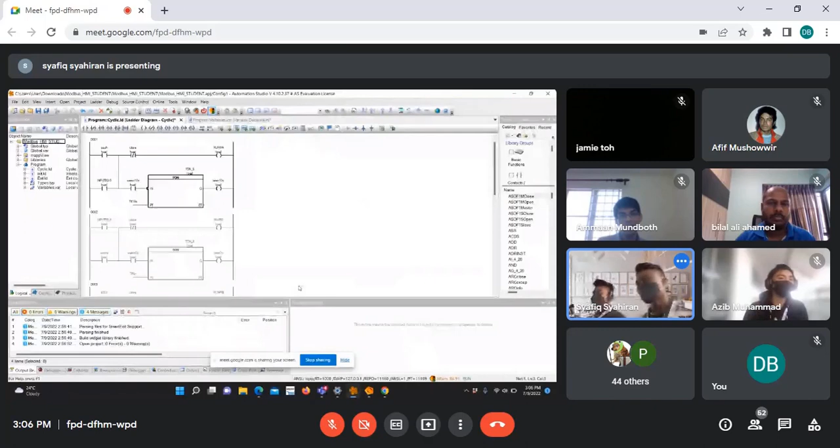Okay. Can you hear us? Can you hear us? Yes, loud and clear.

Good afternoon, first of all. So we are from Polytechnic Brunei.

So this is our PLC design. We are representative, one of the team representatives from Brunei. So this is our project, PLC project.

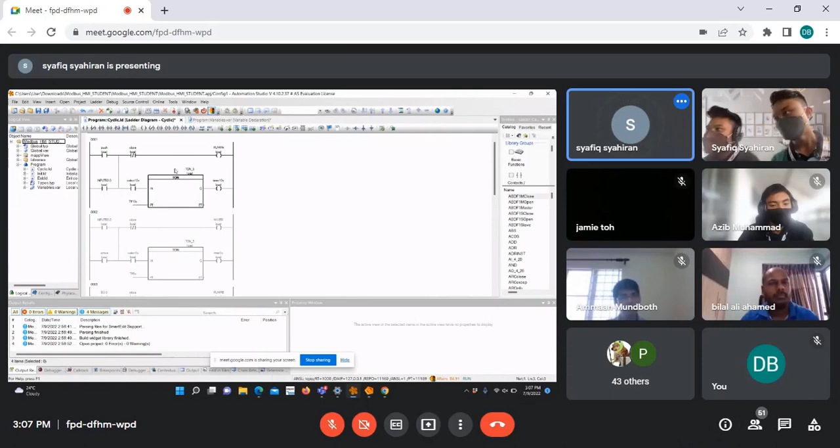To be honest, it's nothing much here, because this is our first time doing this kind of project, the programming project.

So here's the push button, PB. So it's connected to the close.

And because it connects to the 3.0 input, after 8 seconds the mixer will automatically open for 5 seconds, and the process will repeat until it reaches the limit sensor.

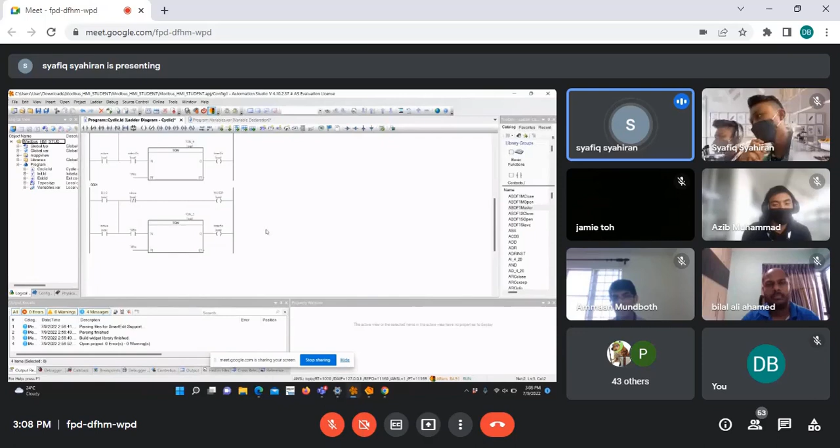So maybe that is what we could do because we haven't had enough time. As you know, this is our first time doing this, so it is very hard for us to deliver what we were taught to do.

Do you have anything more to add? That's all from us.

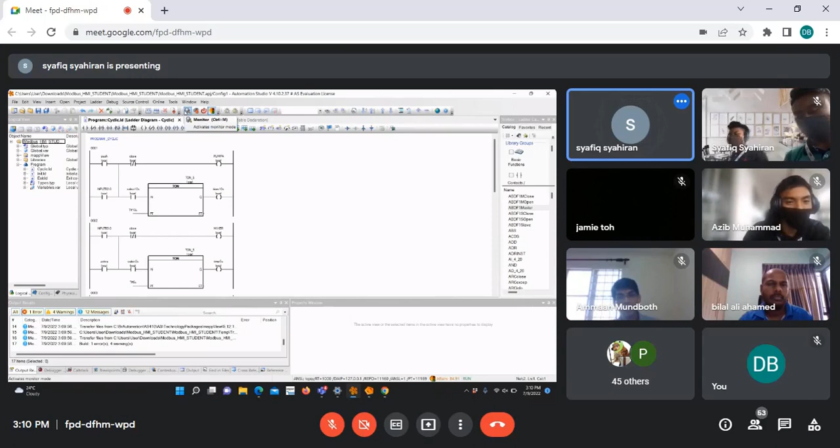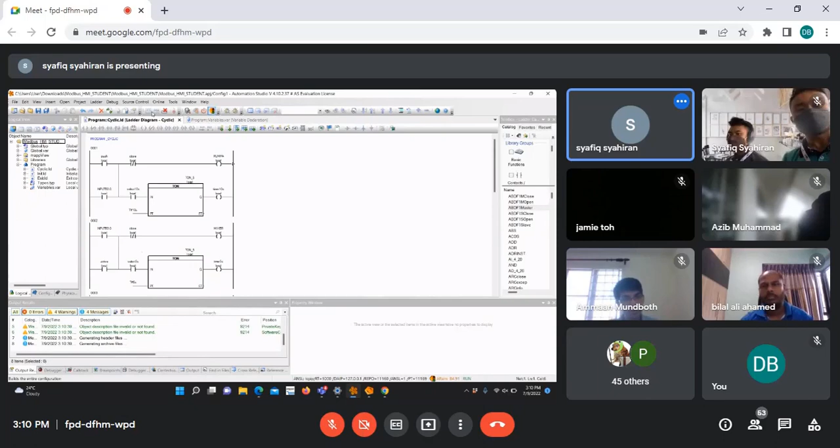How come it's an error? Monitoring. Oh, there's a problem.

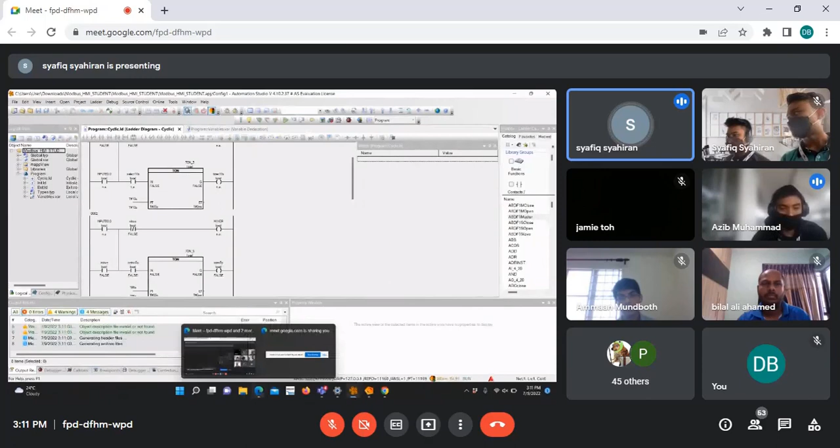There seems to be an error. Mr. Steven, there seems to be an error on the simulation. So maybe you can continue on with the next question. Yeah, sure, I think they can continue. No problem.

Is there any question from other judges for this team? Okay, if not, thank you Group Without A Name for that presentation.

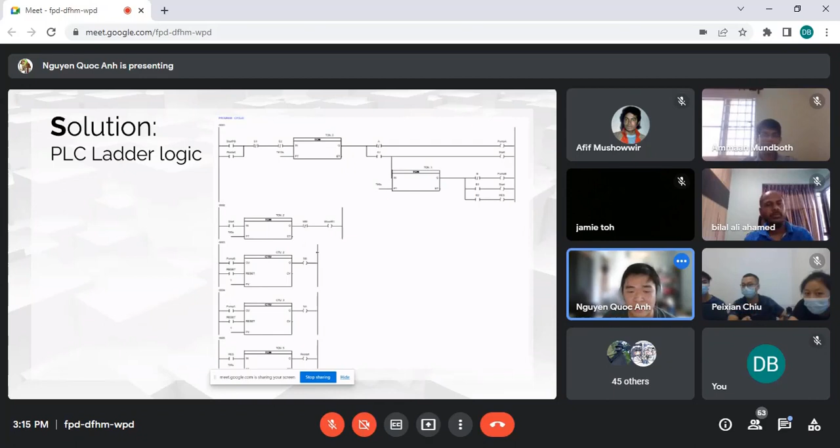For the video, because we are having some technical issues, we cannot do the recording in time. So sorry about that. Okay, so now this is our Q&A.

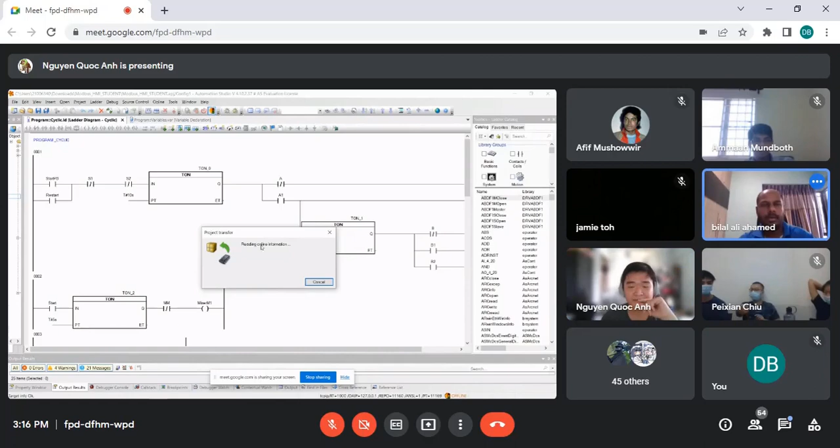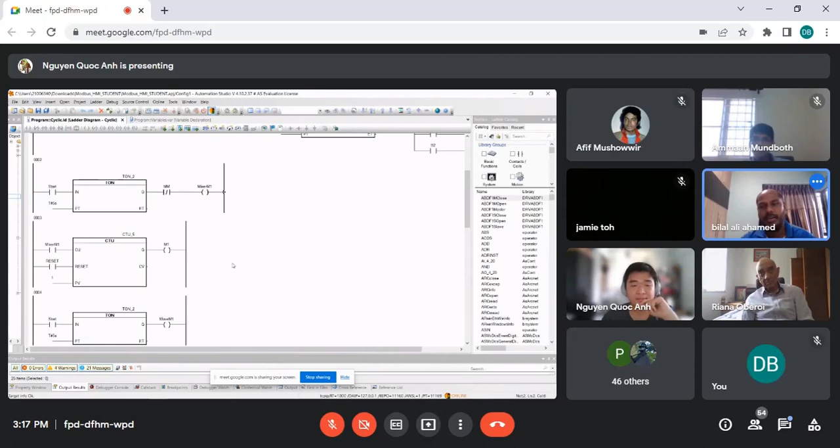Okay sure. Since you guys are studying, I can recommend something here: you can add a comment line for each of the ladder rungs so people can read the logic behind it. For example, start, stop, this is okay, but what logic does each ladder perform? If you make a comment on top, that's how it's normally done. This is just a few lines of program, but if you have a few hundred ladder logics, it's very difficult to read through and understand the logic. So it's always good to have a comment on top of each ladder. Keep it up, good.

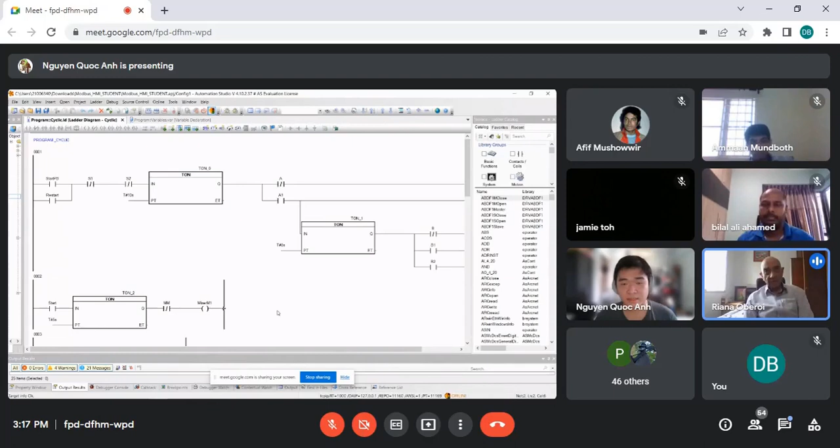In the trials, the sequence of activation is the way that we wanted, but so far we're still having the problem with restarting the pump to get it to an off position so that we can start the loop over again. The problem we have is actually the signal here. We cannot get it to reset from the start, so the TON here cannot restart itself, and that's the only problem we're having until now.

What is the total time of the whole one cycle? I think everything together, I would say about 23 to 25 seconds.

And you said you had a problem with starting the mixer. The mixer, so far we can get it to operation. So far, the CTU here, which you want to use to reset it, hasn't been tested because of the problem I mentioned earlier about connecting online with the software.

How much more time would you need to fix it, do you think? I'm not sure, but if possible, maybe about 2 hours, so that we can go through everything once more and make sure it's working properly.

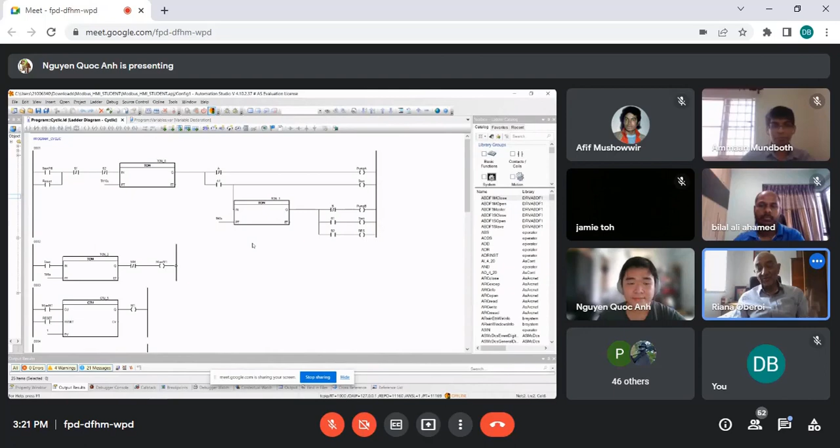From your problem statement, I got a glimpse of what you're trying to do, so I was able to comment. Thank you very much for that.

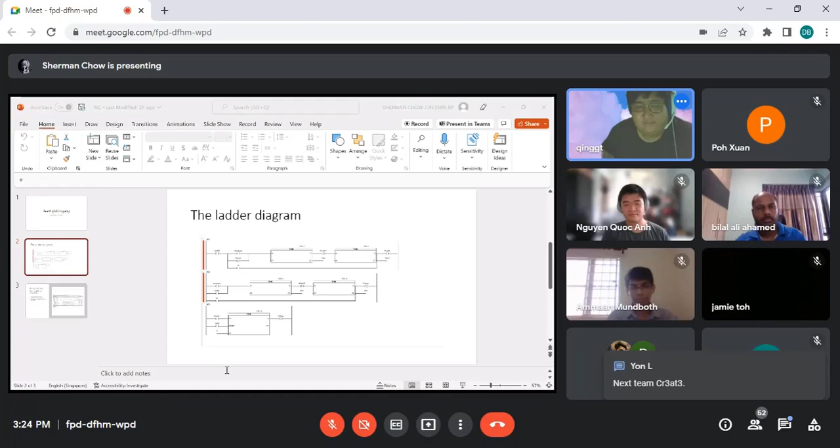So this is our ladder diagram for our circuit. Can you make it bigger? Sorry, I'll zoom in a bit. First we have the start push button, and then a timer for each of it, because the requirement is to have certain timing after it closed. So we put the timer beside the button as required. After that we use S2, which is like a break - so let's say it reaches a certain limit, it will let it flush through.

For the counter used for the third circuit, we need to connect the first counter, which is at the second circuit. After that we put a reset below the counter. After that the Q will be connected to the full tank - it can help us count how many times the start button has been pressed.

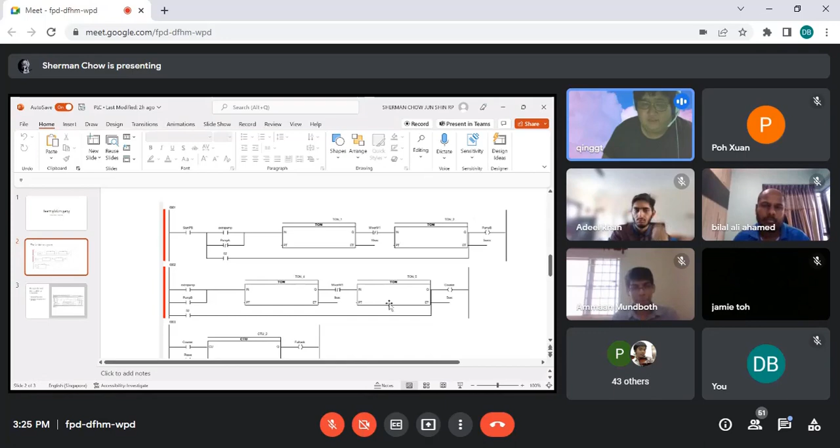I think Sean will present how the parallel backup pump works for it. For the parallel path for the backup, we just add another initial pump, so when the first signal comes in, it just goes through.

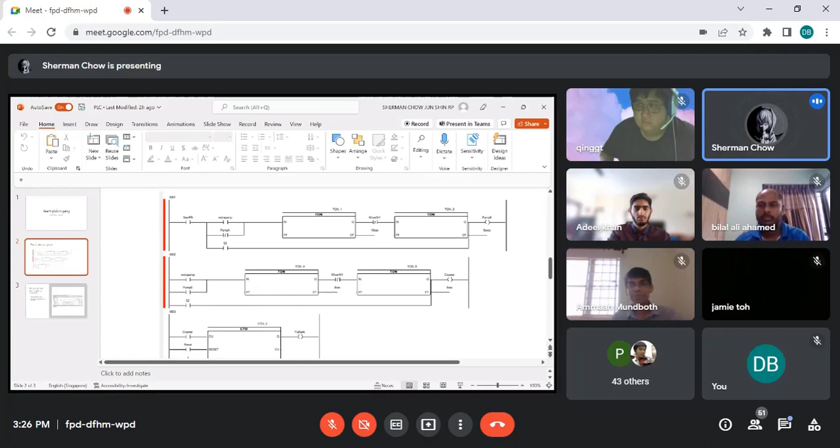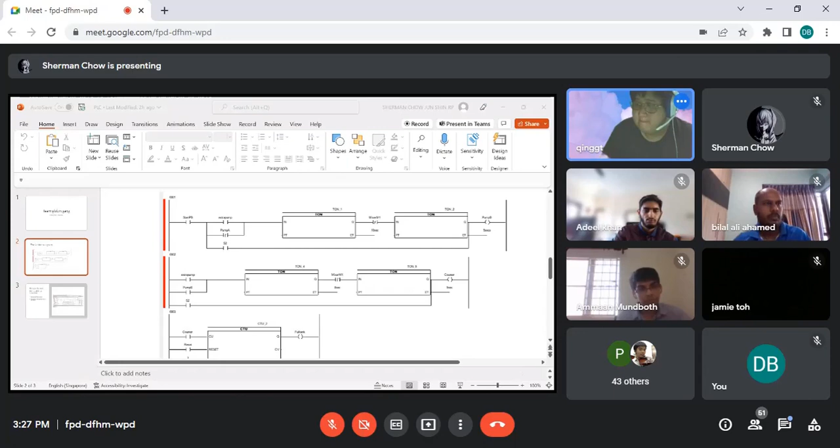I think I'll explain - we add an extra pump parallel to pump A and pump B because if pump A or pump B has any problem, it will go through the backup pump placed in parallel. For our circuit, it has an error, so we are unable to simulate it, and when we face the error we are unable to solve it as we are not sure which part of the circuit has the problem. We tried a few times redoing the circuit and faced this same problem. I think that's all for our presentation.

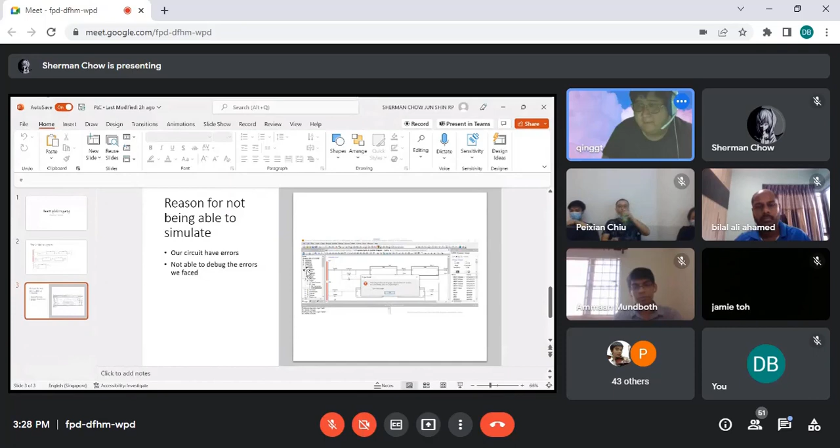Just as general feedback, it's not a good idea to put timers in series. If you wanted to do these kinds of things, it is better to get into a new ladder. Putting two timers in cascade sometimes confuses people, and also we cannot think of the next sequence. So it's always easier to break it down and make it simpler - that would be the best approach for next time.

Thank you. This is Vineet here - could you not simulate anything while doing the programming, or could you do something while writing the program to simulate partially? Sorry, I can't hear you properly. What I mean is while writing the program and downloading to the PLC, could you do partial simulation, or could you not do the simulation at all? I can't do the simulation at all. Ah okay, you cannot do it.

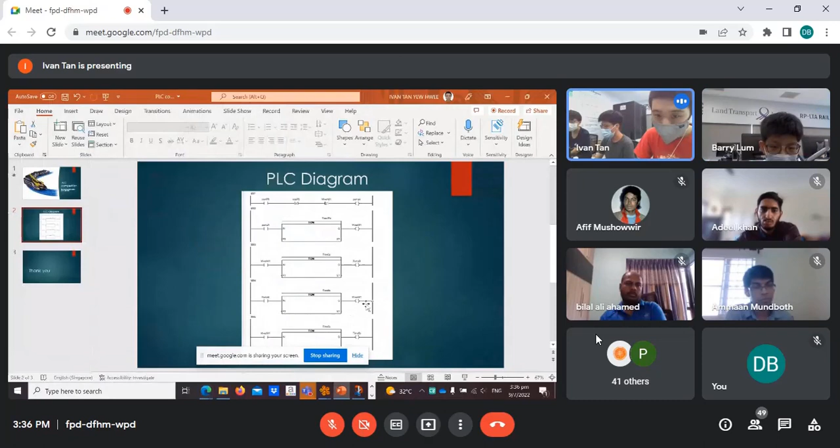Yeah. And also, let's see. Thank you, Ivan, turn off one of your mics.

Do you have any question for us? Judges, are there any questions for this team? For the timer, is there any time inserted? I see you leave it blank. We tried to add the time, but we were having some difficulties with that.

Okay, any HMI? I don't think so. Okay. Are you able to simulate using step functions, like one by one, at least? I can show you our simulation.

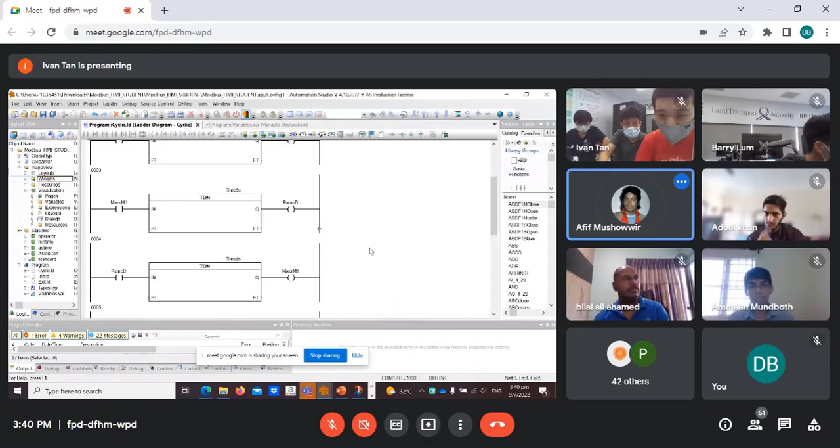Hi, you got 2 more minutes left for Q&A. So yeah, this is a reminder, you have only 2 minutes left. Our simulation is having some issues. Problem. No. Sorry, sorry. Yeah, if you all have no questions, then thank you.

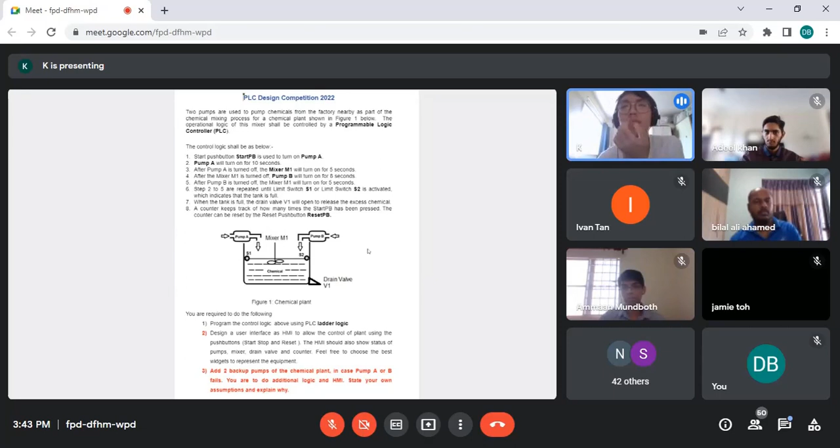And looking at this, it was really intimidating to us at first because it was really beyond what is fundamental to us. And so this is how our thought process went about that. So in the end, we decided to come up with a rough diagram of how we wanted our circuit to look like.

And we started thinking about what widgets are needed and planned out a rough idea of the circuit. So we did quite a lot of research and decided upon some TP blocks and a counter block, a CTU block basically. We felt that there was minimal online documentation to help us in this project. So in the end, we came out with a rough idea of what we learned from the workshop and tried to put it into a consolidated idea of what we want.

So as you can see here, this is our start PB block, which is just a normally open contact that we can use to start the machine. And this is a positive edge contact block which detects a change from 0 to 1 logic input to start the mechanism going.

So when the mechanism starts, we decided to put it into a counter block which increases by 1 every time the start button is pressed, as seen here. This includes a reset button to reset to 0, which is tied to our stop button, which we'll be talking about later.

So for the first step, we decided to talk about the first pump, which is pump A, and we decided to use a TP block of a 10-second limit, which will give a Boolean value of 1 to the pump A output, allowing us to pump chemicals for about 10 seconds. Connected to this, you can see our thought process for how we will implement the backup pump, which is we decided to use a NOT and AND gate.

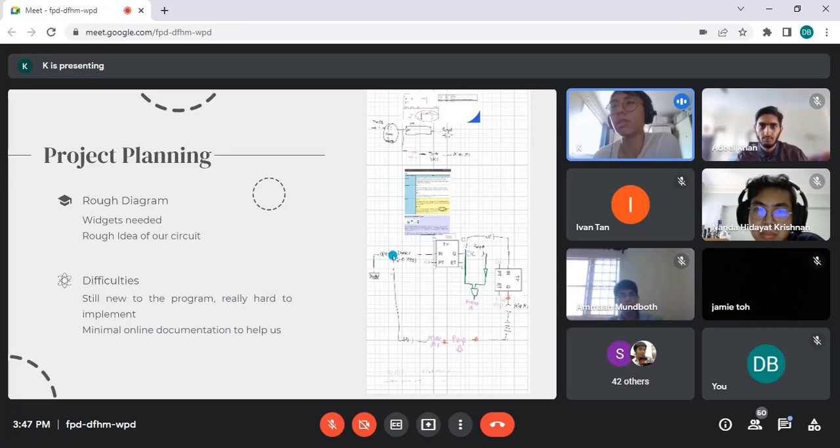Then to repeat the program, we decided to use a negative edge contact block, so basically when the mixer itself, the final mix, has been done, then the program would send another Boolean value, a true value, to the counter, which kickstarts the entire mechanism again. And this is just a breakdown of each individual component of our planning, which I just went through.

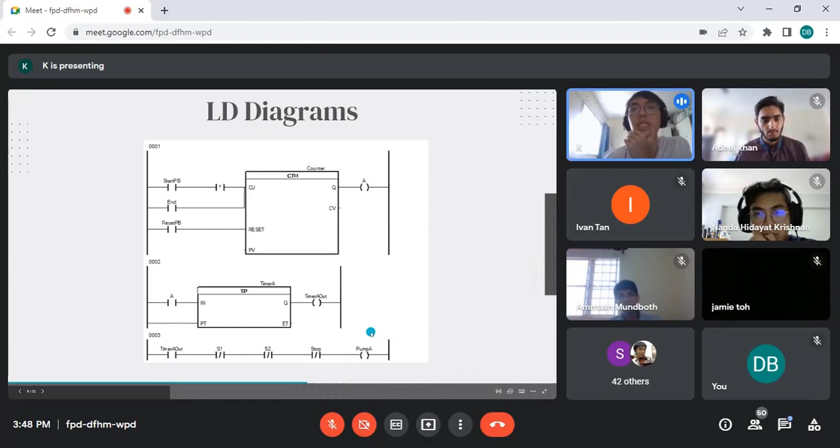And this is how our rough idea of how our LD diagrams will look like. From here you can see our start PB and a positive edge block, and this is our counter block, the CTU block we have used, with a reset PV component here. This will be connected to the first timer block, and this timer block is then connected to the pump A, which is how we implemented the pumps in. This is our implementation of the backup pump, which is using NOT and AND gates.

Sorry to interrupt, team, but your time is up. Our time is up. Okay.

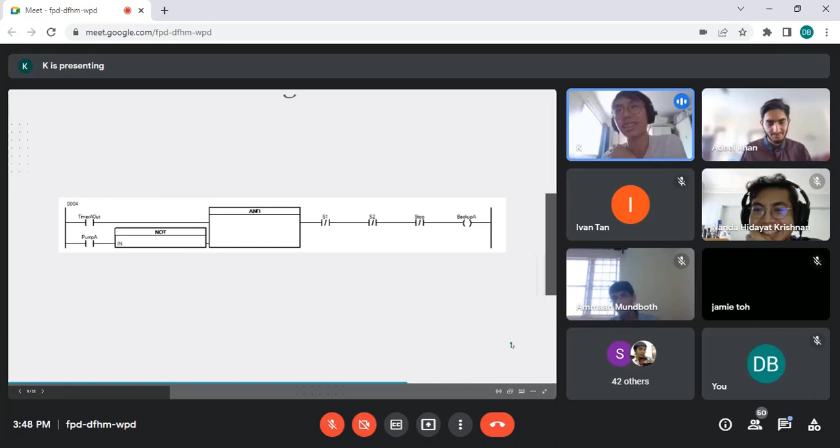Can I say some stuff before I end off? A short few lines. Anyway, we felt that this was a really difficult project, and we felt that given more time, we could complete our project. But we are not really familiar with the program at this point in time, and we will seek to complete this project in the future. Thank you.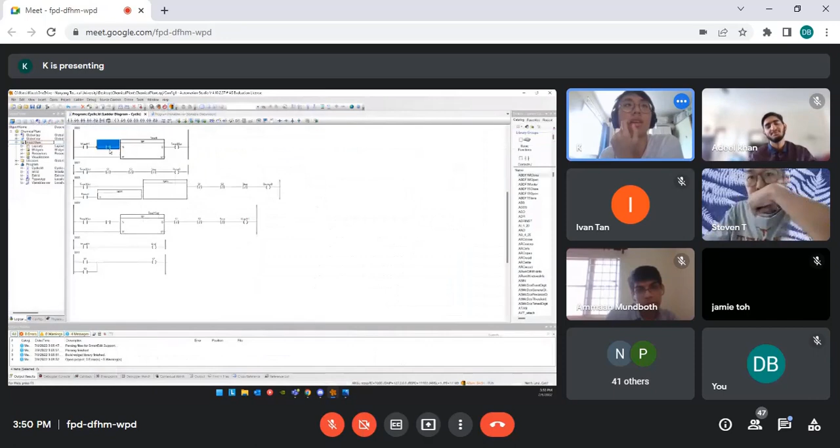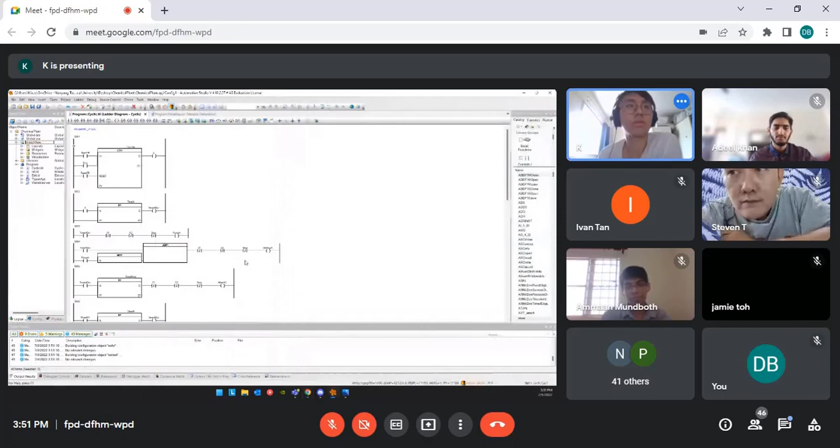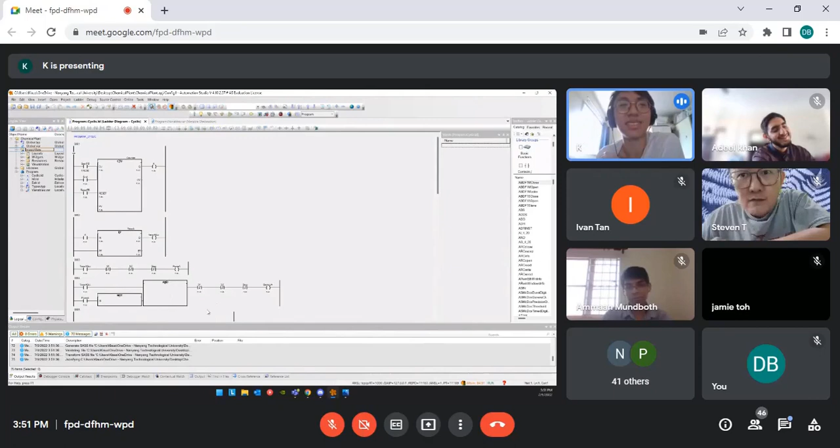We tried building it, but we ran out of time at that point, and sorry, it's taking a while. I'm not sure if it's working actually. We couldn't fix some of the transfer issues and stuff, so it actually can't run.

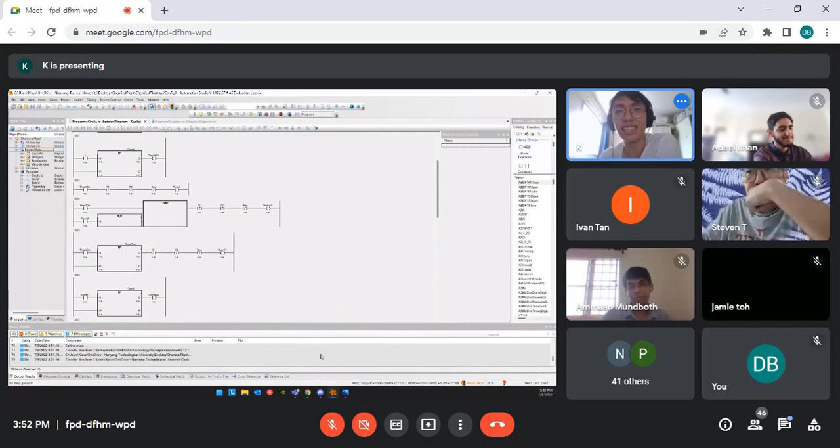Yep, okay for me. Yeah, so it gets stuck here for some reason. We couldn't fix the problem for quite a while, so we ran out of time. Yeah, so we did manage to get an HMI implementation, which, yeah, it's not a very familiar program.

So, do you have any more questions for us?

Just a general comment to all the teams: we can see the hard work you've put in, but if it doesn't work or simulate anything, then all your effort is wasted. So even if it is 50%, just leave it there and try to show us what you have done. That's more important than completing your entire task and leaving it not working.

Yes, understood. Maybe just to add a little bit, maybe you can share the lessons learned during this competition, like what this team is doing right now.

Your theoretical level of explanation is very good, but we would like to see it on the screen as a workable solution. So if the theory is okay, but when it comes to operational execution, this is not sufficient. At least you should show us some simulation part of it.

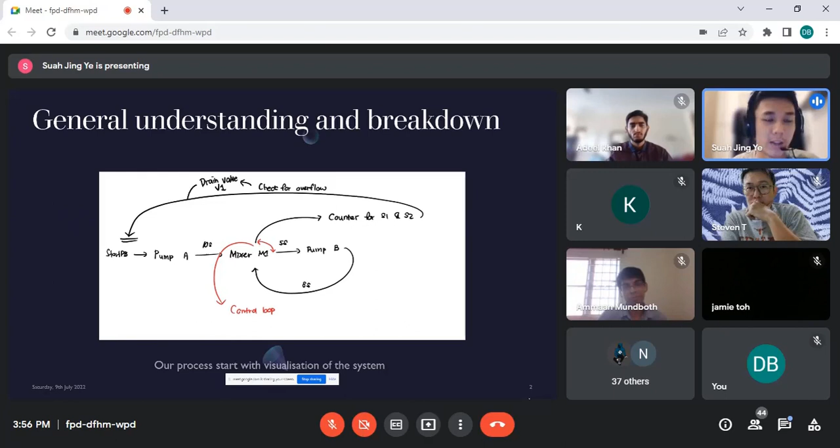So before I jump into the introduction of the ladder diagram in Automation Studio, I would like to confess that we were unable to complete what the questions required us to do, and we were also unable to reach the HMI level. So we were only able to complete part of the ladder diagram.

Okay, so jumping to the system, this is the system activation. Before the start PB, we have a system active so that the system can run and provide power to all the ladder logic before we start the system. This is nothing much important, it's just to prevent bugs and any errors.

So moving on, this is pump A. When the start PB is pressed, pump A will begin its work for 10 seconds. After the 10 seconds, the reset pump A will activate and stop the pump from continuing.

Then we'll move on to the mixer. The mixer will start for 5 seconds, and after 5 seconds, the mixer will also stop by having the reset mixer M1 cut off.

Then pump B will also activate later on. Do not worry if it looks confusing for now, but we'll have a video later to show how the flow will be going. This is roughly how it will be working.

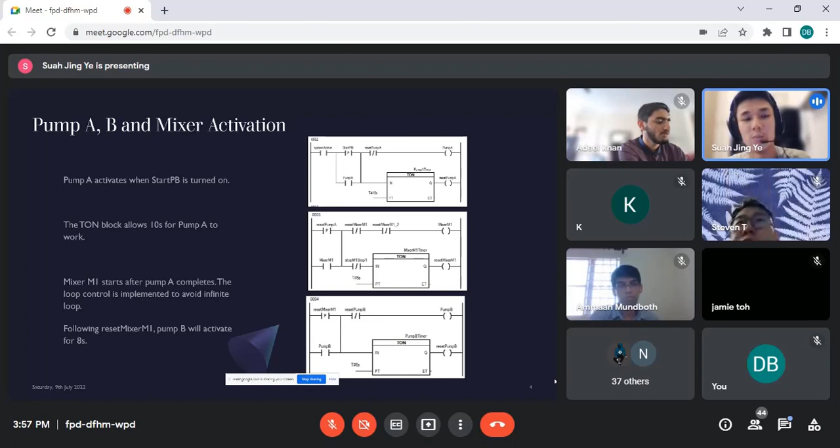Of course, we have more than one method to stop it, because we don't want pump A to repeat non-stop after pump B is completed and mixer M1 is completed for the second time. We found out there's a bug where it keeps repeating, so we put in a lot of time to try to figure out how to stop it from happening.

Thus, we have this loop control, which we call loop control. The stop M1 step 1 will start after pump B stops. So pump A begins, then mixer begins for the first time, and then pump B will start.

After pump B started, we will stop this. We have this loop control to prevent the ladder diagram of the first mixer step 1, the first time the mixer M1 is starting.

Otherwise, it will repeat pump B and then M1, and then pump B and then M1 again. This is the problem that we found out, so we add another diagram to control this.

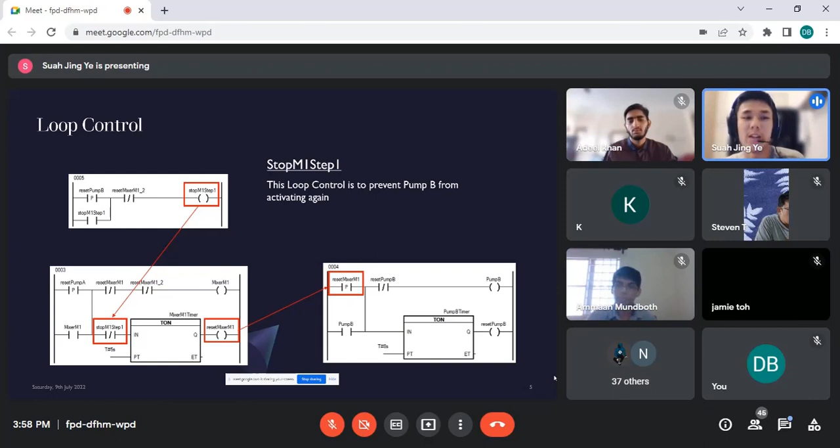This is the second time where the mixer M1 will begin after pump B is initiated and completes its work. So mixer M1 will activate again for 5 seconds, and after it's completed, we added a counter here.

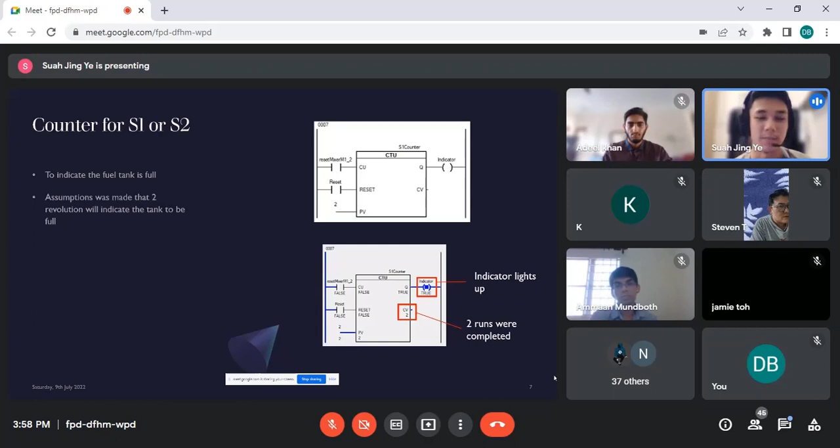We are not sure how we need to indicate that the fuel tank is full, so we decide to just make an assumption where after 2 revolutions, the fuel tank will be full and the indicator will light up. This is just an assumption we made, and it may be very wrong. However, we were running out of time, and this is what we figured out.

So this is some of the stuff that we managed to complete in the 3 hours. I know it is not a lot, but we poured in our heart and effort to figure out everything we could. We were able to activate the pump for 10 seconds, then activate the mixer the first time, then pump B for 8 seconds, and then the mixer M1 the second time.

And then we were also able to make the S1 counter increase by 1. Once the counter reaches 2, the indicator will light up. That's what we were able to achieve, and that's all.

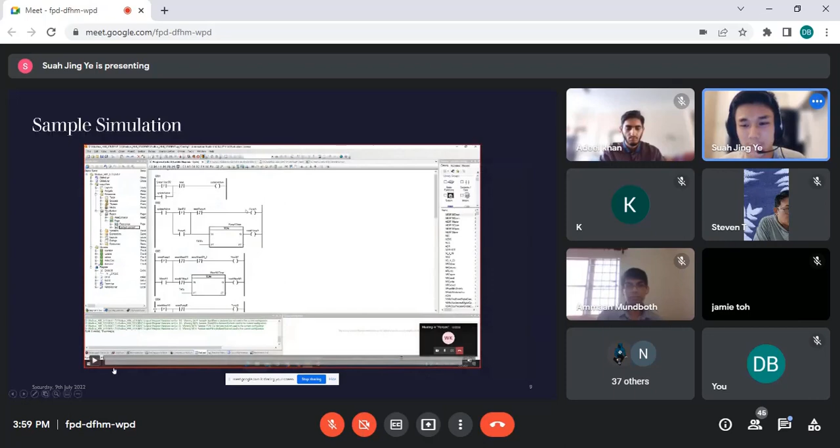So this is a sample simulation. Before I jump into here, I would like to talk about some of the things that we could improve on.

So we missed out the backup pumps, that's for sure. We also actually used 2 LD ladders to activate mixer M1, which we think that with the proper logic implementation, we could make into just 1 ladder diagram, and it would be more efficient that way.

Obviously, HMI is going to be a better user experience if we are able to complete it. We were not able to complete it, not really due to time constraint, but just because we are lacking familiarity in the app, which is Automation Studio.

So we are not really familiar with the application, and we were not able to fully understand the logics of how the ladder diagram works and all the components in there. I'm pretty sure there are a lot of components that we do not know about, which could make this job easier and could be done within the time limit. But just because of our lack of knowledge, we were not able to complete it.

In the diagram, the pump A has not started yet, it's just to make sure all the power is flowing in the ladder. Next we'll start the PBU. So PBU1 started, and you can see pump A is actually running, and the timer is also counting down already.

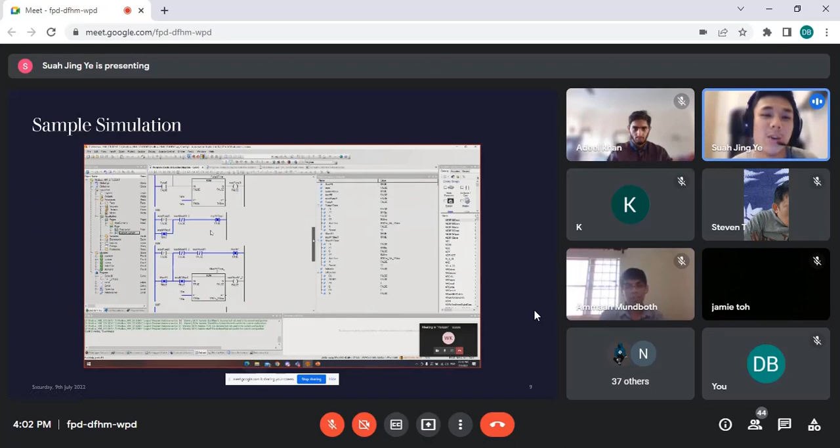It's a cheap method and I think it's inefficient, so we could actually further improve on that in my opinion.

And so finally, M1 will run for another 5 seconds and it stopped. Then as you can see, the counter increased by 1. So running again, if you run the simulation one more time, the counter will become 2 and the indicator will light up.

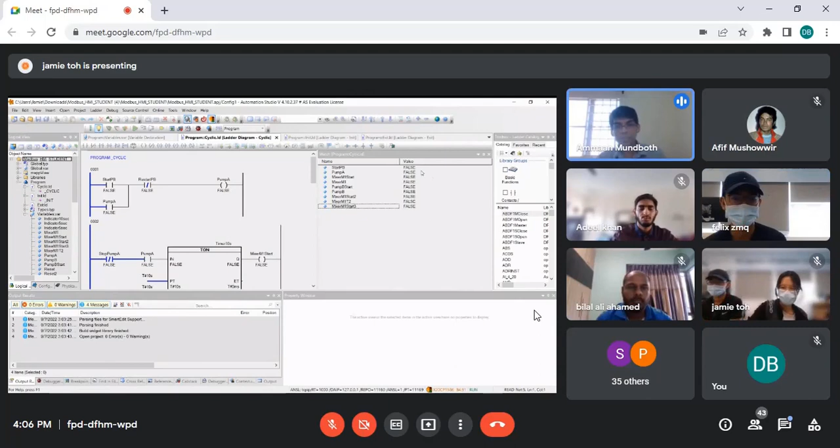And so we have some errors for our simulation.

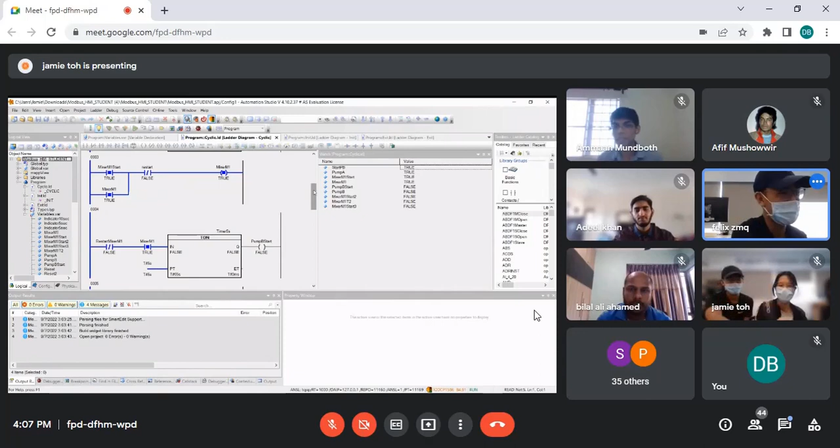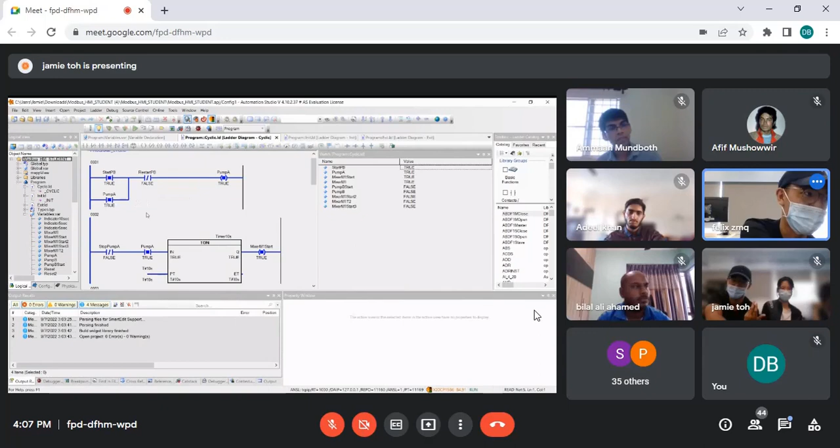So with this timer, I would want to latch it to this part with normally closed contact. So after this timer, you will cut this latch and pump A would stop. So likewise for the other mixers, it repeats the same pattern using a timer to cut off the circuit.

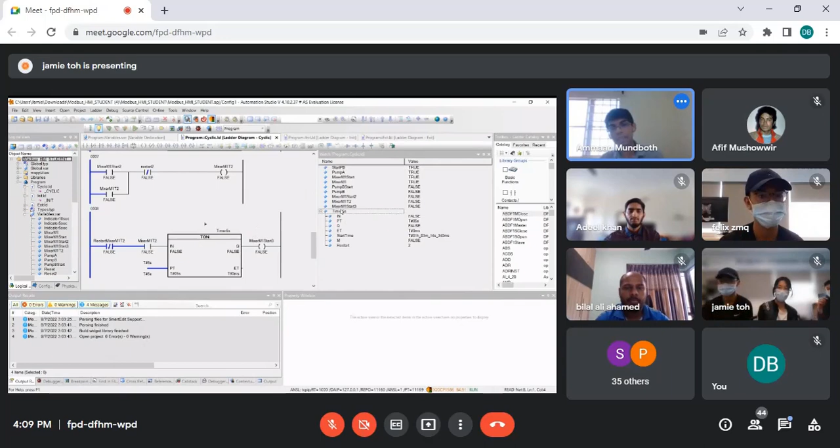Can you rerun the simulation again, just one more time? Okay, sure. You can run again. I think we forced it, isn't it?

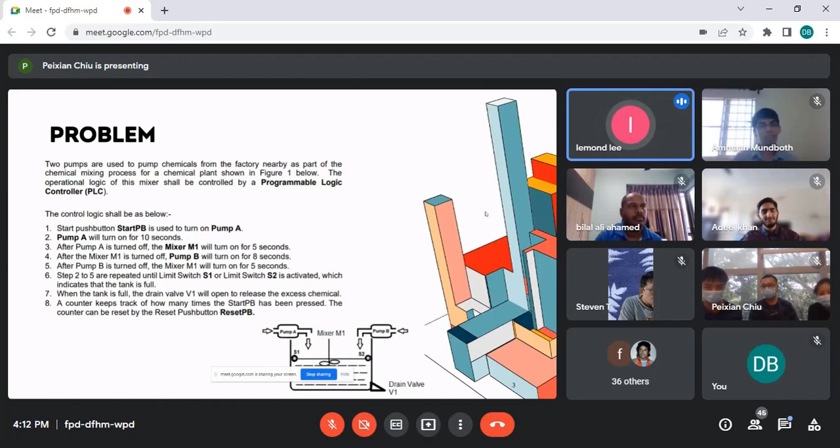Okay, so we looked at the problem statement and broke it down into its key components. So what we did was turn it into an SFC, which Lemond will explain. So in the SFC itself, based on the problem statement, we have a few criteria of a flow. So the SFC itself shows a very nice flow.

So you can see at point number 0, all the way at the start, we are waiting for the start button to be triggered. After that, pump A, then the amount of time, mix again, pump B, amount of time, mix again. And then at the end, at number 5.

So we then check for the switches, the limit switches, whether they have been triggered. If they have not been triggered, then we go back to pump A again to start at point 1. So once it's triggered, all the way to point 6, then we turn on the valve, and we'll turn it on until the switch has turned back off. Okay, so this is our whole criteria for the whole ladder programming.

So the next part is that we actually convert the whole thing into ladder itself. So you can see that this is our whole ladder programming. Let me go side by side so you get a nicer view.

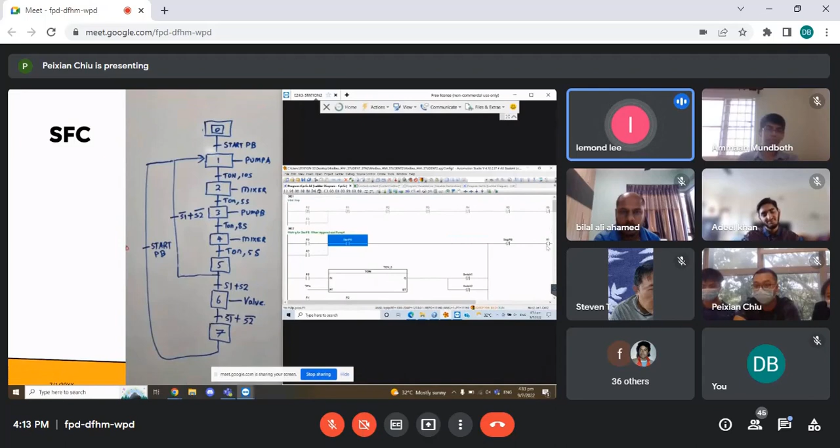Okay, so you can see pump A again at point number 1, and it's waiting for the push button, then it goes to R. So I use R in terms of 0, 1, 2, and 3, all the way under 7. So this goes all the way down, and then R2 itself - it's a bit small.

So R2 itself then turns on the pump. R2 turns on the mixer, and then the timer again. So this is how we do the whole programming.

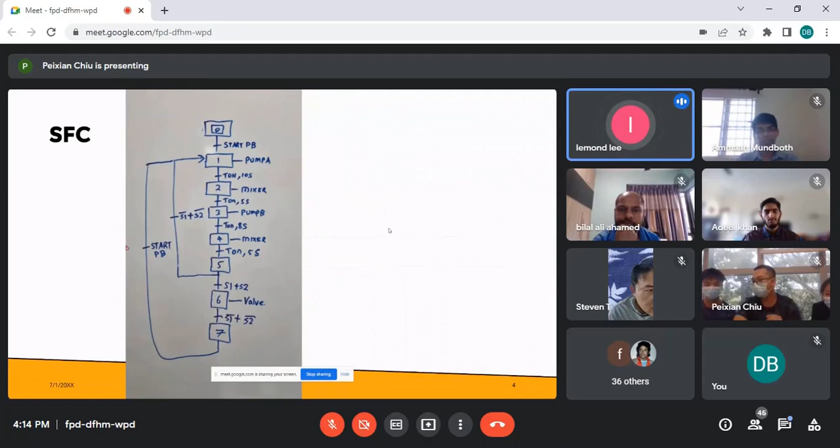So the next part is we'll showcase our solution on our HMI to interface everything. Show the TeamViewer. So our HMI - initially we had some issues with the HMI.

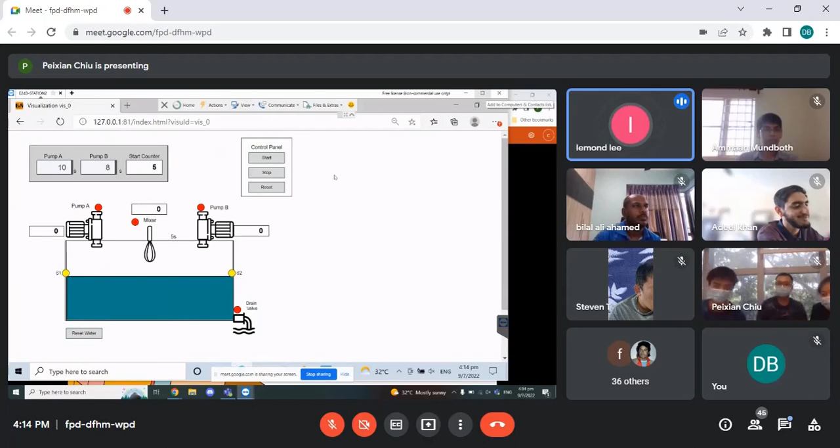So initially we had an issue with the HMI where we used push buttons, but the push buttons were latching instead of triggering, and that kind of messed up our whole ladder diagram. So actually, after lunch we changed it into momentary switches.

So right now you will see the cycle will start, and now that the water level has passed the limit switch on the left, S1 is being triggered. However, you still continue through the cycle until end of cycle, then you turn on the drain valves to get the proper mixing ratios.

So as pump B is finishing and the last mixer cycle turns on, you see the drain valve at the bottom will turn on and you drain back down to below the limit switch value. And then the cycle should end. It will stop.

Give it a bit of time, the drain is a bit small. Okay, yeah, so you have the start counter at the top also, and for pump A and pump B—

This is more for future work. We wanted to have a recipe so that you can change the amount of pump cycles that you want, in terms of seconds. So it's not complete, but it's just showing you that this is something we want to add on in the future.

I think that's the end, and that would be the end of our solution. One more point is that we didn't do the backup pump also.

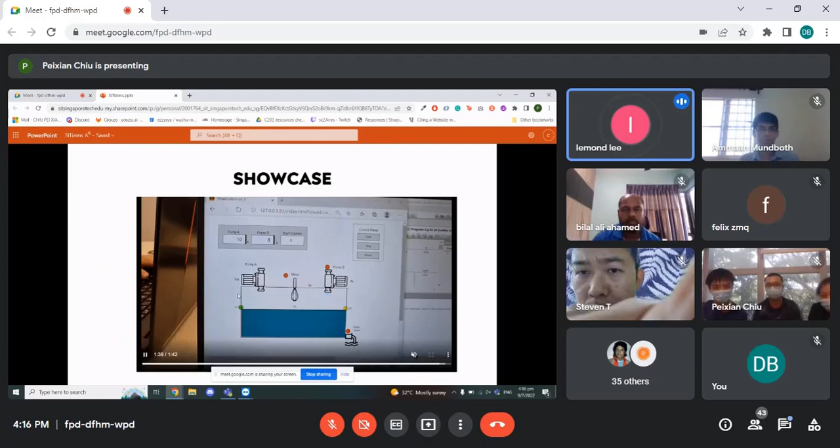So what actually happened was you just keep looping through, because the HMI used push buttons instead of momentary buttons - the push buttons were latching in the software, for some reason we couldn't figure out. So that was the problem we faced, and that will be it for us.

So maybe I can speak. First of all, I would like to thank all of you for inviting me to judge this event, and it was very interesting to see the students trying out, especially when they don't have any experience in PLC programming. At the same time, we saw teams with different kinds of skills and trial methods, and their presentation skills. But overall, I think it was a very good showcase by the students.

Of course, in an event, some will be declared winners, I will say, but at the same time, it's a learning experience for everyone. So if you are not, learn out of it and see how you can better yourself. Good luck to all of you for your future endeavors.

Thank you, Mr. Vineet. Mr. Steven Teo, is there anything you would like to add? Yeah, thanks. I think this is the second year that I've participated in this judging. I really appreciate you guys inviting me. So every time I judge this competition, I feel that everyone is the winner, lah.

So you all basically will take away experiences from this type of competition. As mentioned just now, this is a platform whereby you can make mistakes and nothing happens, because in real life, basically cost is an issue, timeline is an issue.